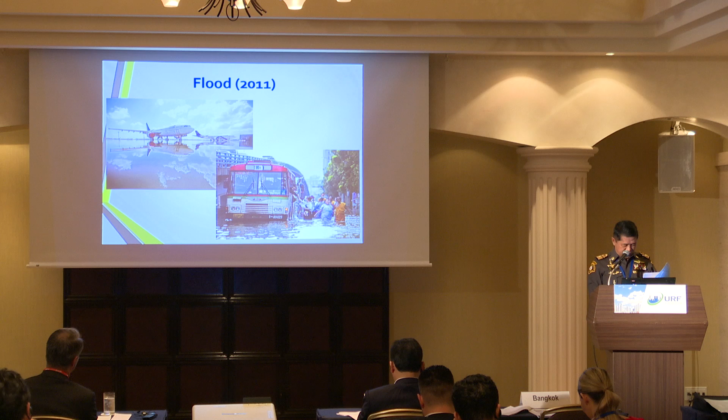The mission of BFRD is every mission for the people. BFRD is the leading organization in disaster prevention and mitigation to enhance the security of life and property of the people and state in Bangkok.

The prevention and mitigation plan has 6 steps. The first step is risk assessment, the system which collects, accumulates, and utilizes information on disaster and disaster risk management, GIS database, and hazard maps. We use 3 involved technologies: remote sensing, weather observation and forecast, and information technology.

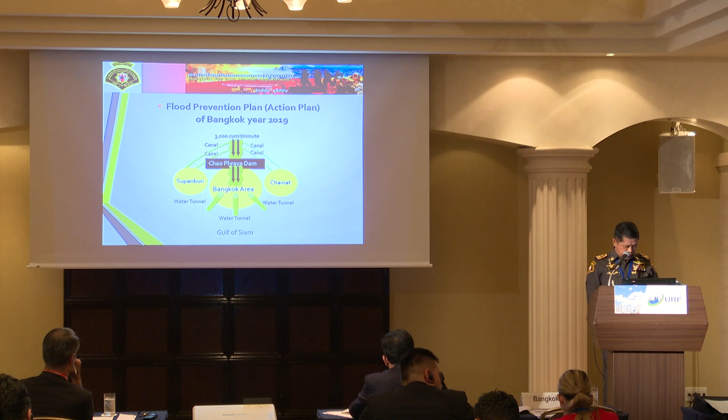For emergency management, it is composed of 5 steps. 1. Disaster prevention and mitigation action plans with considerations for vulnerable people are formulated at local authority level. 2. Implementation of community-based risk management. 3. Incident command systems applied for management situation by objective. 5. Achievement of early warning and response plan for life and livelihoods.

For rehabilitation and reconstruction, there are also 5 steps. 1. Evacuation, healthcare, and sanitation are also advocated. 2. Monitoring health status within the community. 3. Provide immediate care for the ill and follow up medical assistance in the nearest medical centers and modules as deemed necessary. 4. Rehabilitation and construction of new facilities and infrastructure. 5. Restore natural environment, moral, social, and economic obligation.

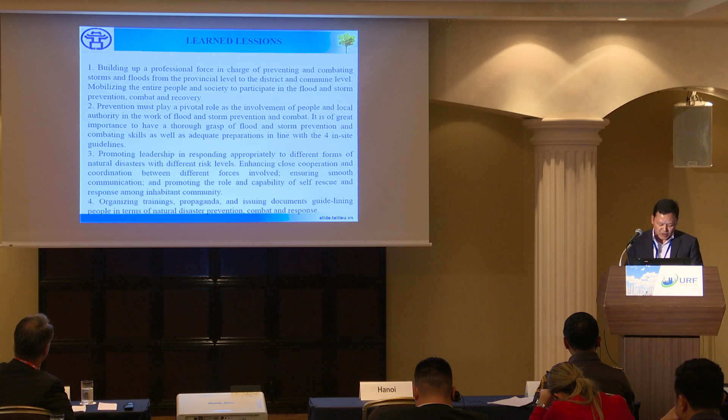Here now I'd like to share some of the lessons we have learned.

First lesson is that be it the typhoon or the floods, they had affected villages and local communities. So it's very important for us to have a group of experts who are quite familiar with natural disasters. Also, it's very important to mobilize the entire people and society. This is what I call on-site: people in the community should be able to help each other, and at the same time other municipalities need to help the communities in question. Moving on, be it communities or villages, it's got to be people-centric.

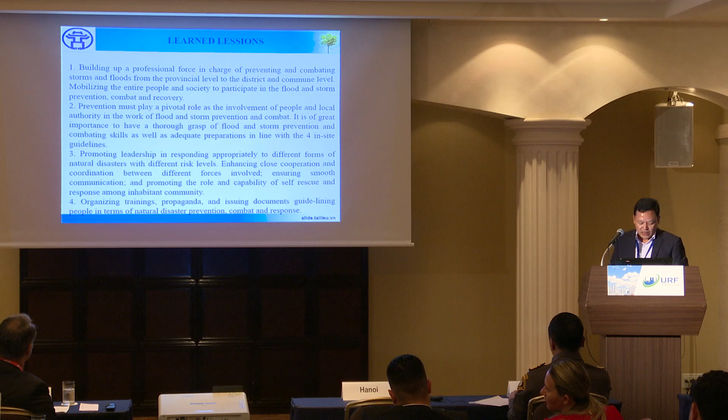The third lesson we have learned is leadership is going to be quite important. We have guidelines to promote further leadership. Item 4 concerns the importance of organizing trainings and propaganda, and we also have to issue documents in terms of guidelines.

Point 5 is it's very important for us to define the roles to be played by all stakeholders concerned. As I mentioned earlier about leadership, it's also very important for citizens to be proactive, and we need to assist them by offering the right information and early warning. Item 7 is we need a really good plan to prevent natural disasters, and also a really good plan to combat potential problems.

We have conducted these efforts and they have resulted in good mitigation of disasters. Thank you indeed for your kind attention. I wanted to share our experiences with you. If you have any questions, I'm quite happy to receive and respond to any questions from the floor, please.

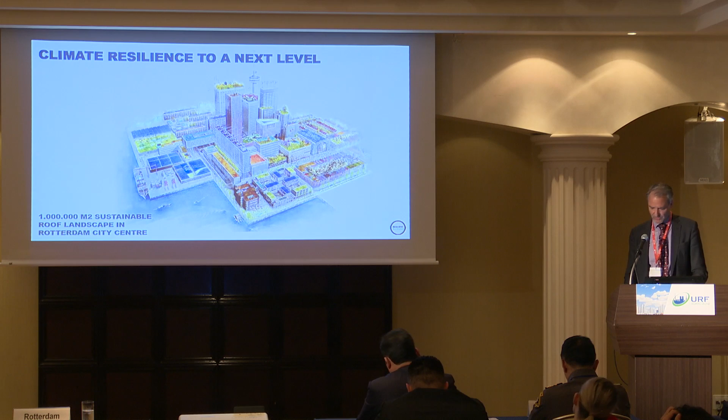We want to not only invest in green roofs, but combine it with, for example, solar panels and small windmills, which is one of the answers to the growth of our city. And if we're able to invest in a new layer in our city, it might also contribute to safety. During a flood, having a second layer, a level in your city, might be an interesting part of your crisis management.

Relatively new to us is that we're also dealing with droughts and more heat waves, not just too much water. For example, the guy putting water on the bridge has to cool it down, otherwise it gets stuck. So our infrastructure also has to be redesigned for the new climate.

Our levees, especially on the regional scale, are made of peat and clay. During dry periods, they can crack and even collapse, and that can cause a flood. So a drought can cause a flood, and that's new for our thinking in Holland.

During a heat wave, we have to control these levees, and we want to introduce smarter control. There are experiments with sensors in these levees, so smart techniques are, I think, important additional non-structural measures in our flood prevention.

It's again about the citizens, especially the vulnerable people. We've been able to use and transform an app from Athens, the Extrema app, as we call it. In case of a heat wave, this helps people find cooler places in the city and places where they can find drinking water taps.

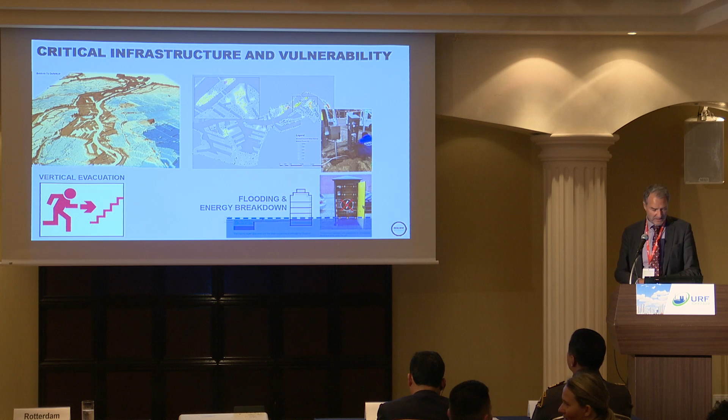And as I told you, we have to find out and invest in vertical evacuation. I think that's something we can learn from Tokyo, for example, or other cities.

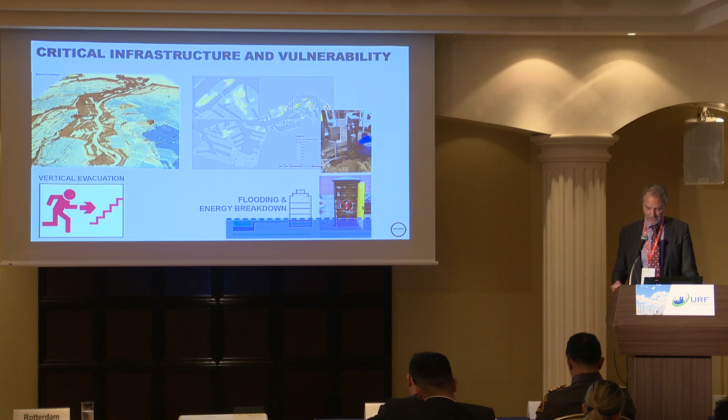We are not really used to evacuation, we always invest in prevention. So evacuation, especially in a vertical way, is something that we have to develop more and more.

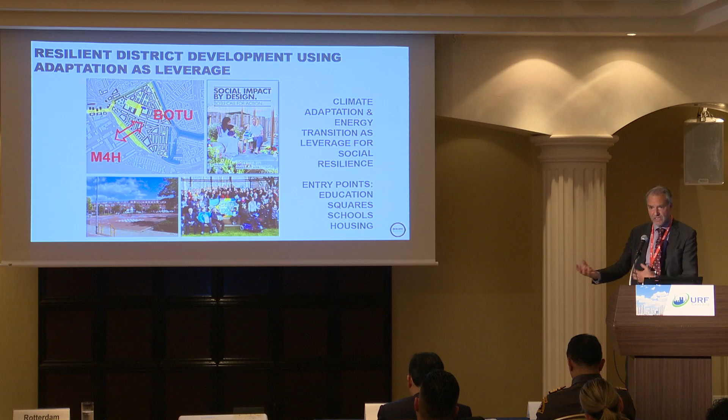I see my time is running out, so I have to speed up a little bit. One new element we're also now facing is resilience as a whole on the level of a district. What we like to do is not only invest in climate adaptation and flood resilience in this district, but find out how we can use it as leverage also for social resilience. So we really are looking for the connections between those challenges. For example, starting with schools and creating resilient schoolyards. And the way we are doing it is a so-called call for action, challenging the private sector, but also citizens, to come up with ideas to work on the resilience of this district as a whole.

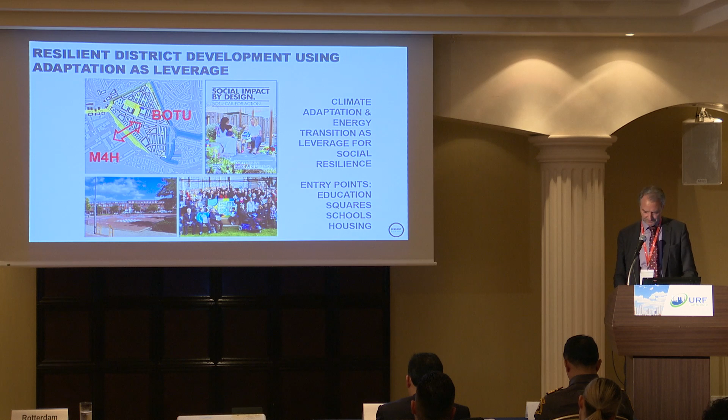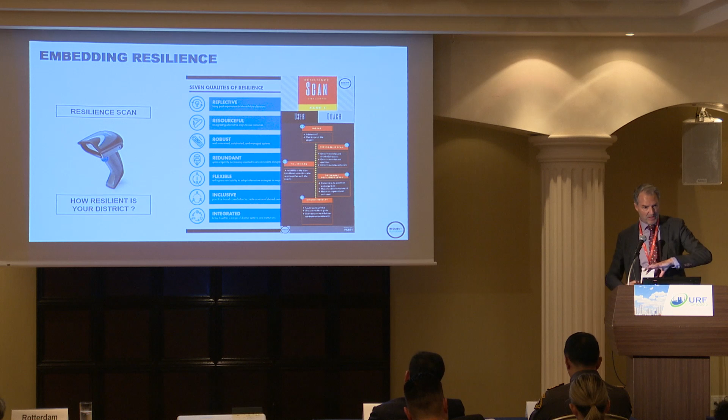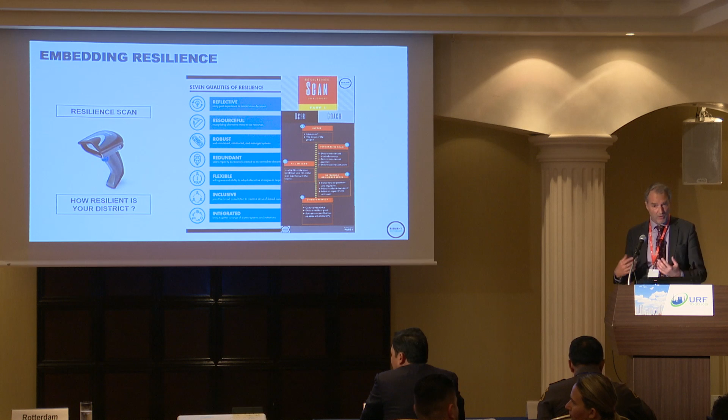A little bit inspired by a Rebuild by Design process in New York. Another part is to work on awareness, but also on the mainstream of resilience, including flood resilience, water management, and climate adaptation - that's the resilience scan. We think it's important that our colleagues at local government, but also important stakeholders in the city, start to embrace resilience as a concept. It has to become part of their mindset, their DNA. That's why we developed this scan. It's about shocks and stresses that you have to deal with, the goals of the resilience strategy, and the 7 qualities of resilience, as we call them. I won't go into detail, but that's the concept, so everybody can apply resilience in their work.

So, concluding, I think it's important to state that it's additional to, of course, investing in your structural measures. It's important to develop holistic strategies. And looking at the latest IPCC report, I think it's important to speed up and scale up - something that's on top of the agenda of the new Global Center on Adaptation. Resilience by design, done in an inclusive way with citizens and by citizens - that's more and more important. And again, the fact that we are exchanging this with each other, networks like C40 and 100 Resilient Cities, is getting even more crucial than ever before.

Thank you very much. Thank you very much.

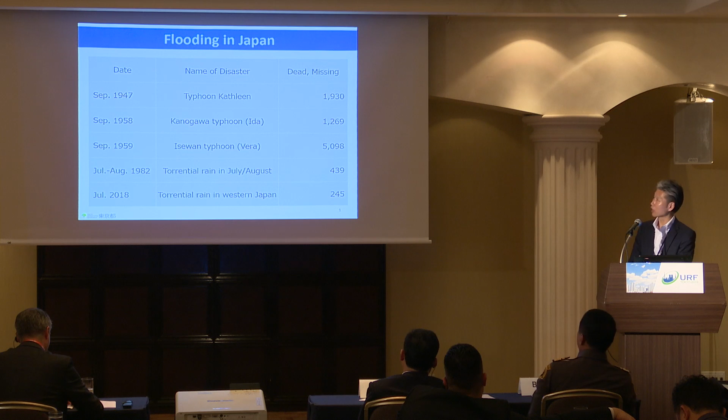Now I'd like to explain the TMG's non-structural measures against disaster. This shows the flooding in Japan and the damage. As you can see, Japan is very vulnerable to flood disaster. Flat land consists of only 30% of the total Japanese area, and the rivers run on a steep slope, so rainfall will fall down from mountain to city area very quickly, and flat land is susceptible to subsidence.

And so-called 0-meter areas have spread, and there is risk not only of flood but also high tide. There is a high risk of high tide and flood. Besides, Japan is often attacked by typhoons. The typhoons generated travel north, bypassing the high pressure area, and pass through Japan.

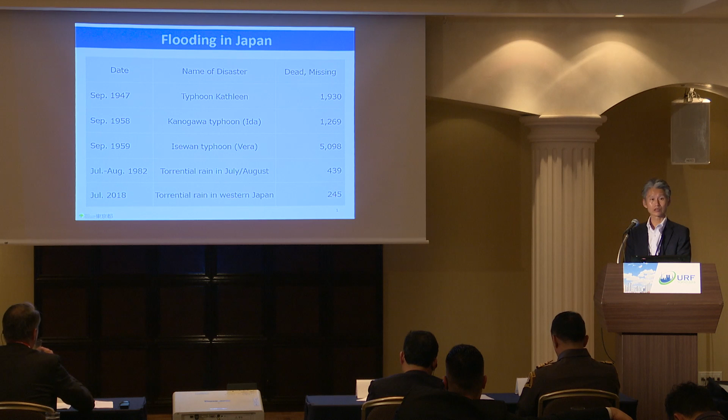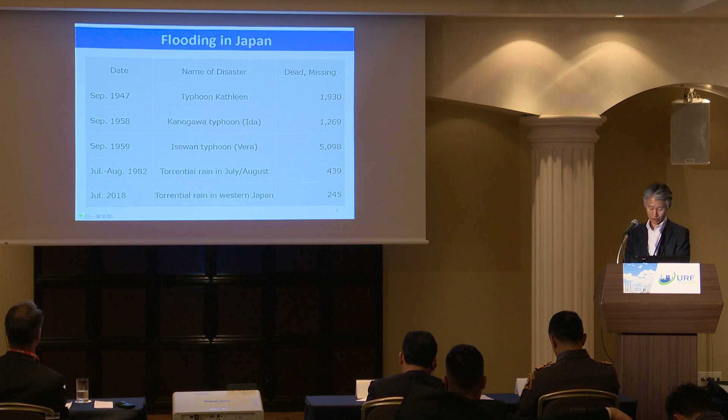A major flood occurred all over Japan, but flood control and flood management have improved, so overall the number of major scale floods has decreased. But recently, almost every year, a large-scale flood occurs in various areas of Japan, particularly last July, when torrential rain happened in western Japan and the toll of victims exceeded 200.

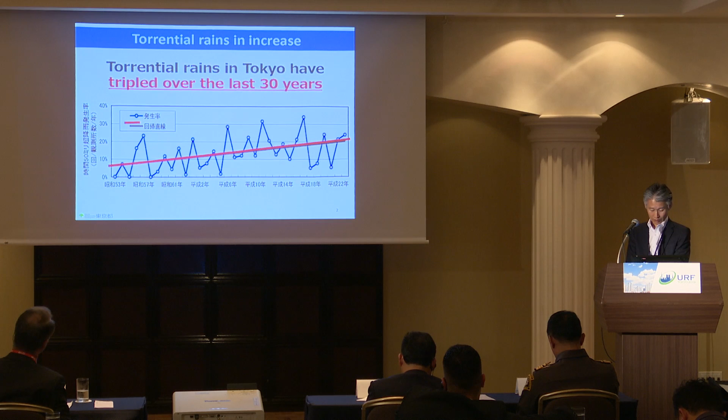This slide shows the data in the Tokyo area. The occurrence of torrential rain above 50 millimeters an hour has tripled in 30 years. As reported, climate change as a result of global warming has made rain more intense, and such torrential rain will become more frequent.

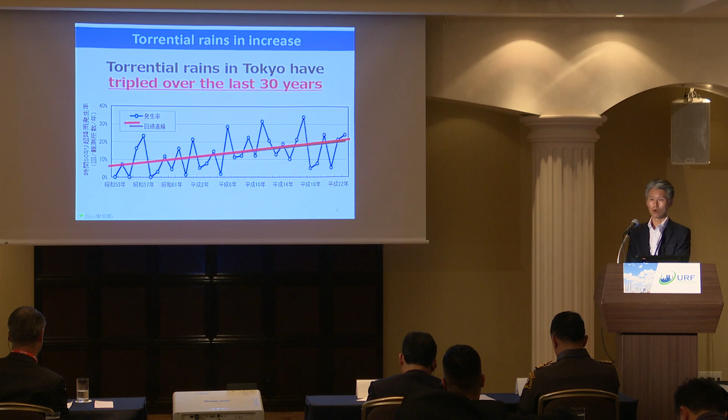And recently, major scale floods, which have occurred across the nation, could happen in Tokyo anytime.

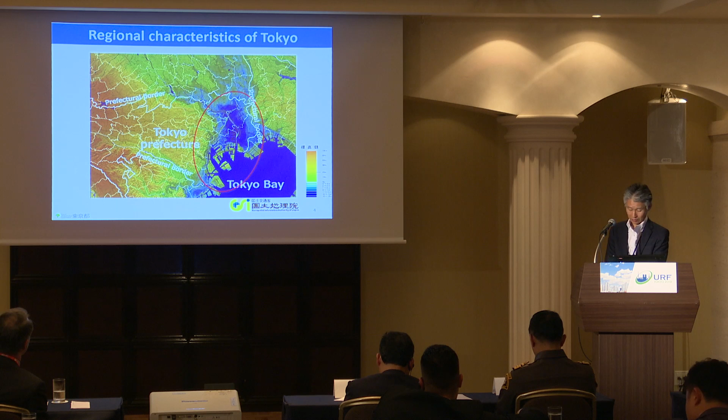This slide shows the altitude of the TMG area. The red dots, the red area, is the east side of Tokyo, and blue to green indicates areas of low altitude. These areas face the river mouth and Tokyo Bay, and carry a high risk of flood and storm surge.

Particularly this dark blue area is the so-called 0-meter area, where land is lower than sea level. Why do we have such areas? These areas used to be above sea level, but due to the extraction of groundwater and natural gas, they subsided by as much as 5 meters.

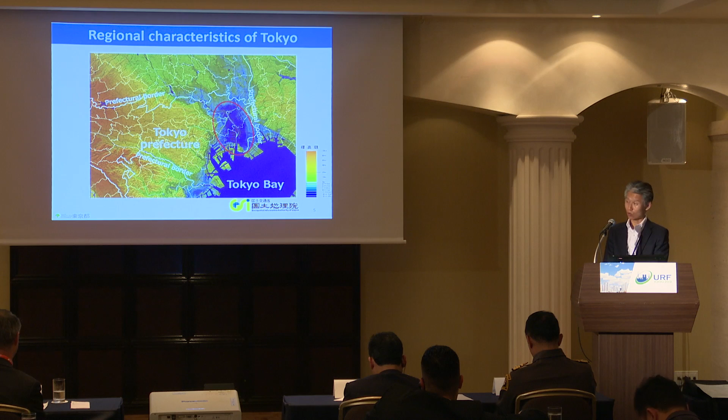The recent torrential rain led to a revision of the law, and we announced the maximum area which carries a risk of overflooding. The east side of Tokyo, which is of low altitude, carries a risk of flood, and here the Arakawa River runs, which could cause a major scale flood.

Arakawa River and Edogawa River both run through this risky area, and expected rainfall would be more than 500 to 600 millimeters in 72 hours. High tide is also taken into consideration at a possible maximum level.

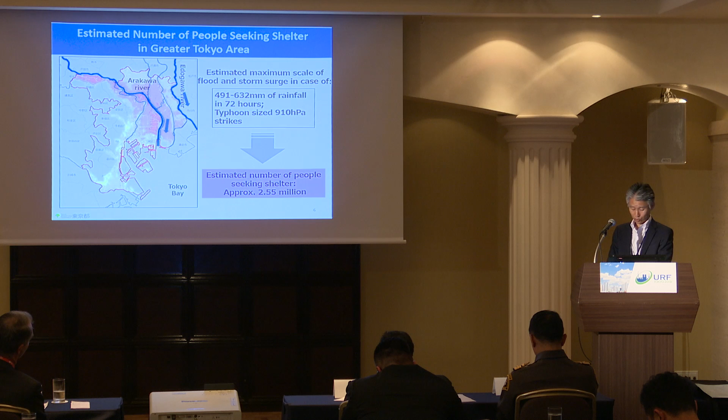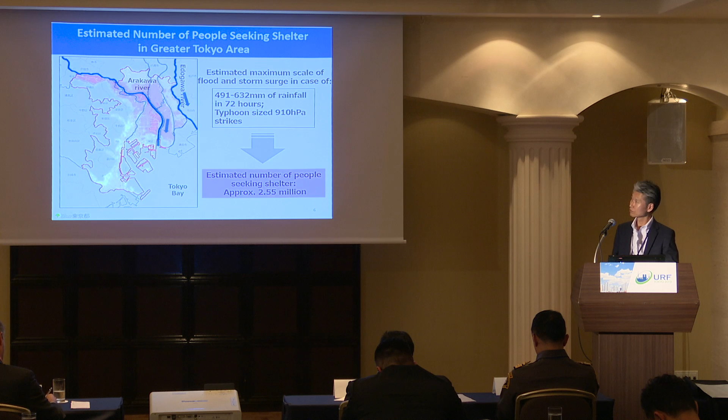The historically biggest typhoon, at 910 hectopascals, was the basis for this consideration of the area. Due to flooding and high tide from such a typhoon, we estimate that over 2.55 million people will have to evacuate in the Tokyo TMG area.

So in order to let these residents evacuate without delay, we are now working on wide area evacuation measures. In case of a disaster, we need to secure the place for evacuation and the method for evacuation, and we are figuring out how to smoothly lead evacuees to the evacuation area.

Normally, local governments have evacuees use local schools and community halls where the disaster occurs. But in case of a large-scale flood, the hard-hit areas tend to expand.

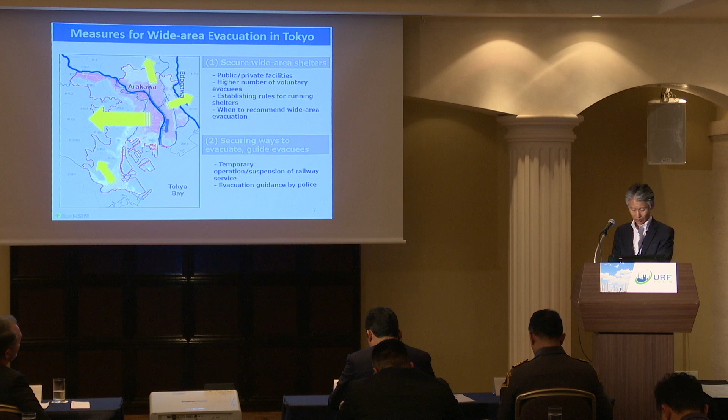So people living in the flooded area need to evacuate in advance, and we are considering the rules for such evacuation. We are also working on the promotion of voluntary evacuation to relatives' and parents' places.

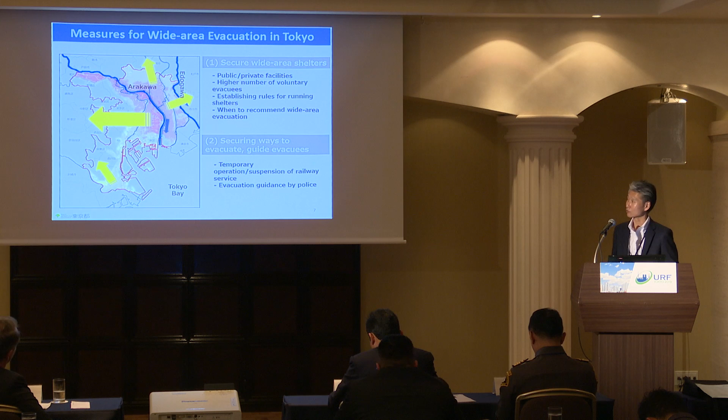So in order to let the huge number of evacuees evacuate with no confusion, we are reviewing the time schedule of train service, and also considering smooth guidance of evacuation to be conducted by police authority. Last year in Western Japan, many people were victimized due to the torrential rain.

This is because people did not actually evacuate, even though evacuation information was released from the administration. Only a few percent of the people evacuated. So in order to have them understand disaster risk reduction information properly and take precautionary action suitable to their living environment,

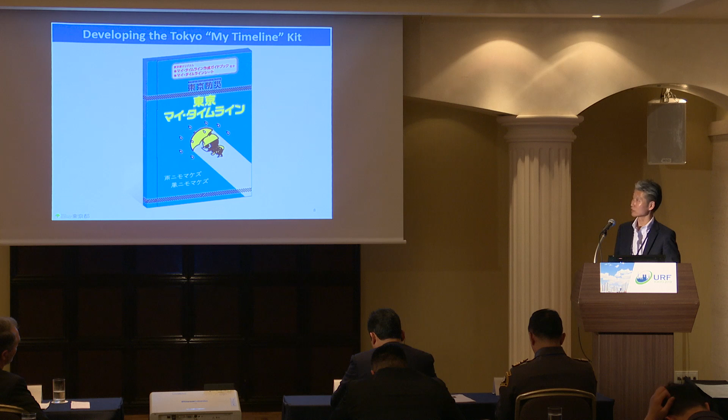we prepared a package for evacuation from flood. This is a Tokyo kit called Tokyo My Timeline. This kit shows what actions to take in the judgment of evacuation. You can stick on a seal on the guidebook, which is the guidebook for the preparation of the My Timeline sheet.

For the children, we attached a guidebook for small children to consider flood, disaster, and evacuation. This is a sample of the sheet.

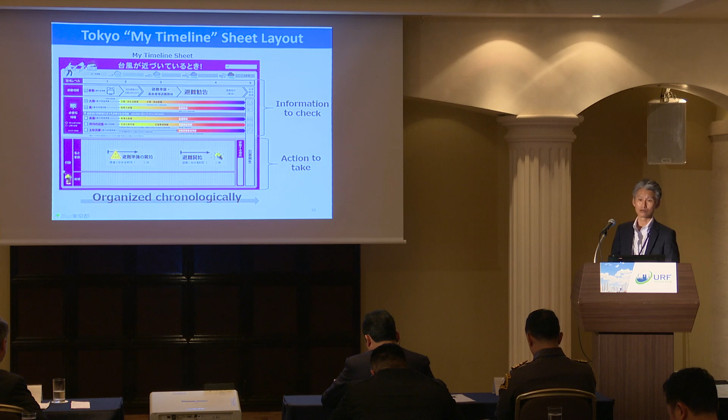In case of typhoon, individual families consider what to think about and what action to take in advance. Specifically, the lower part of the slide shows, from left to right, the passage of time, and in the changing situation, what actions to take will be recorded and sorted out in advance of the disaster.

So I have explained hard copy based information and data. We have also developed a tool to prepare such data on a smartphone, so you do not have to write down the guideline and information for evacuation. You can input the data in the smartphone, which would be helpful for evacuation.

And also, in order to confirm where you are and how you are evacuating, it is important to know what sort of flood risk your location has.

And it is correlated to a GPS function. This tool indicates the flood risk map, which shows whether or not you are in a flood expected area, or what sort of degree of overflood could be expected.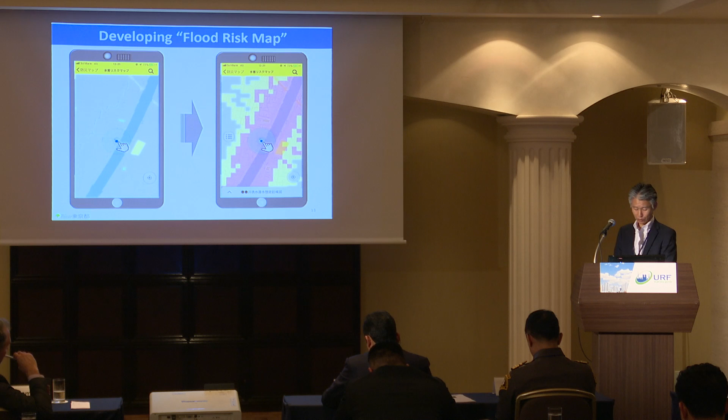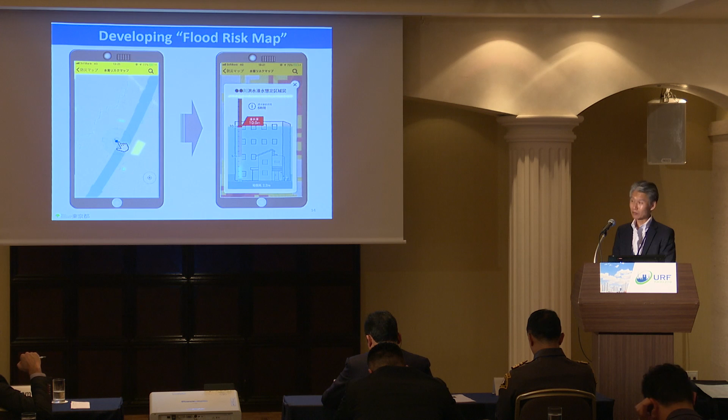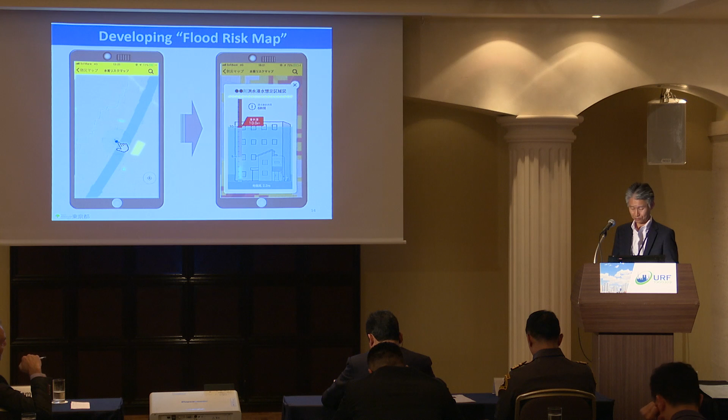A map which shows the risk of flood will be installed in the disaster risk reduction application TMG prepared. By extending such non-structural measures extensively, we are going to improve the awareness of Tokyo residents to flood disaster.

So in a substantive way, I have explained our initiatives. You cannot stop the disaster, but we can mitigate the damage as a result of disaster.

Next year, we are going to hold the Olympic and Paralympic Games to realize a secure and safe city. We are going to take various DRR measures so that we can create a disaster resilient city, Tokyo. Thank you very much.

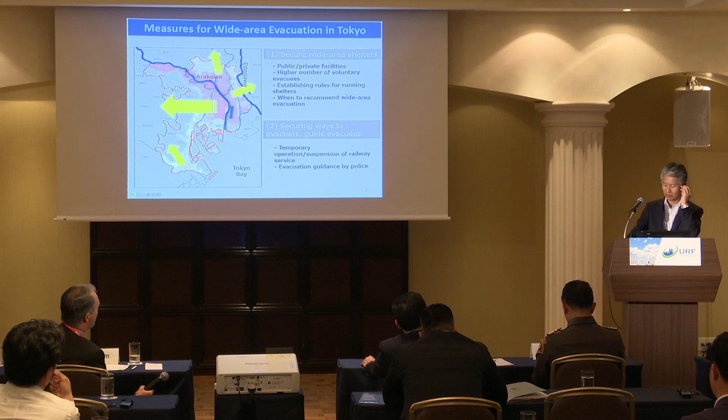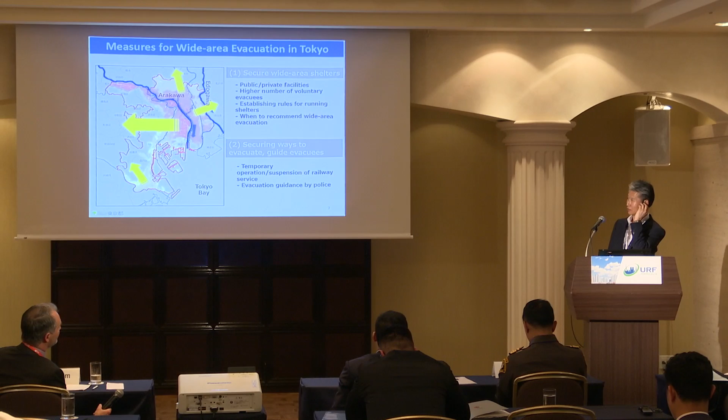Thank you very much for your questions. This is a wide area evacuation initiative.

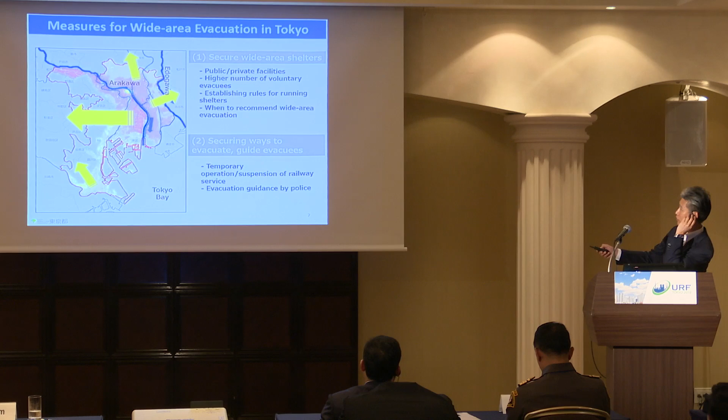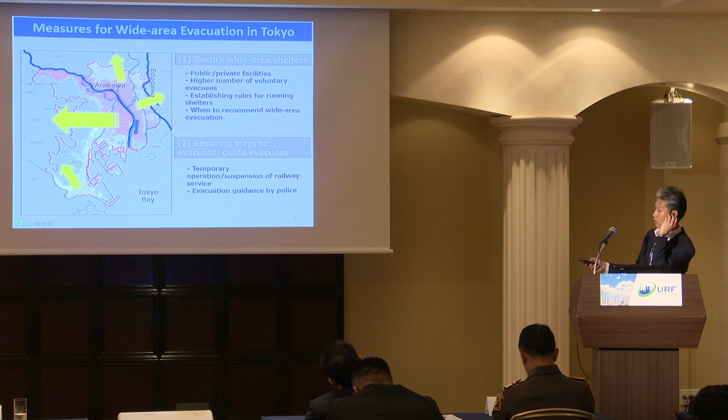This river is large-scale, Edogawa River and Arakawa River, which are under government control. The residents in the area around these rivers will foresee the arrival of a typhoon and a flood in advance. So if you live in these areas, we request them to evacuate to an area which would not be attacked by the flood or typhoon.

So this is an unprecedented action. We presume approximately 2.5 million people will be subject to this new evacuation measure. So this is quite a new evacuation measure.

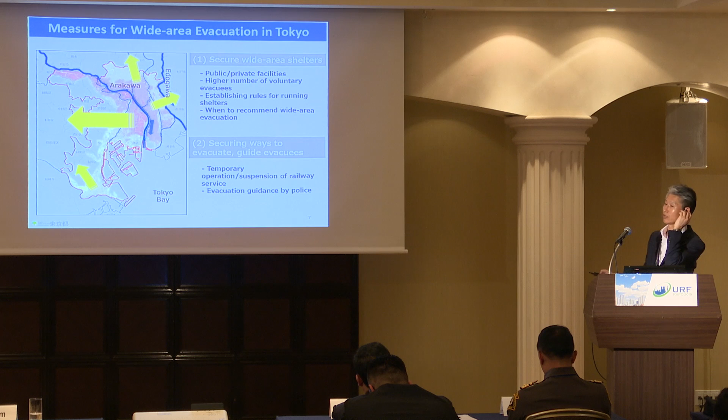So together with the national government, TMG is now negotiating with various stakeholders, including train companies, in order to build a consensus for such innovative evacuation. That is the activity this map explains.

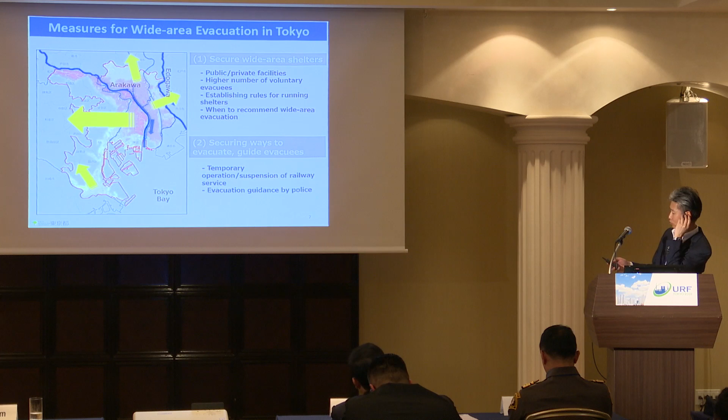And also you posed a question on the application, about evacuation to higher areas. So in general terms, in case of flood or tsunami - back in 2011, the Great East Japan earthquake - the authority asked residents to evacuate to higher areas.